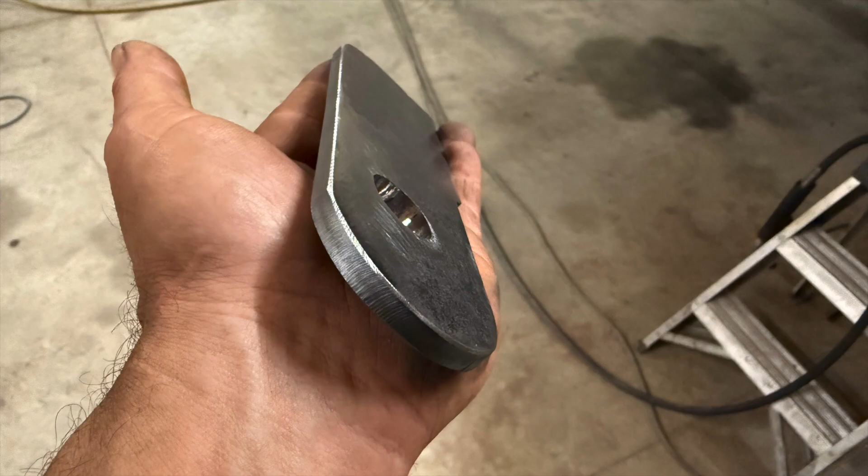Hey y'all, welcome back. Today I'm going to cover how I make simple brackets with my Premier Plasma CNC table using the software that came with it, which is Punch ViaCAD 2D software.

When I first learned how to run my table, I was beating my head against the wall trying to figure out how this thing worked. I watched videos again and again, pushing the pause button tons of times because I was trying to focus in on what he's actually clicking on while listening and putting it all together. So I'm going to show you today, hopefully in slow motion, compared to what I've seen out there.

Now that I've been using this, it becomes second nature, so it's real easy to go fast, but I'm going to try to slow it down so you guys can learn, and hopefully this will be beneficial to anybody with that same type of software or maybe even a similar table, who's just trying to get an idea how this stuff works.

Because I know myself as a fabricator, I loved the idea of the plasma table, and I'd seen how things could be punched out so quickly. But when I first got it, it was frustrating, to the point where I was almost ready to give up and sell the stupid thing, because I thought it was stupid at that time. I was having some emotional kickbacks with this thing, because I don't always like learning.

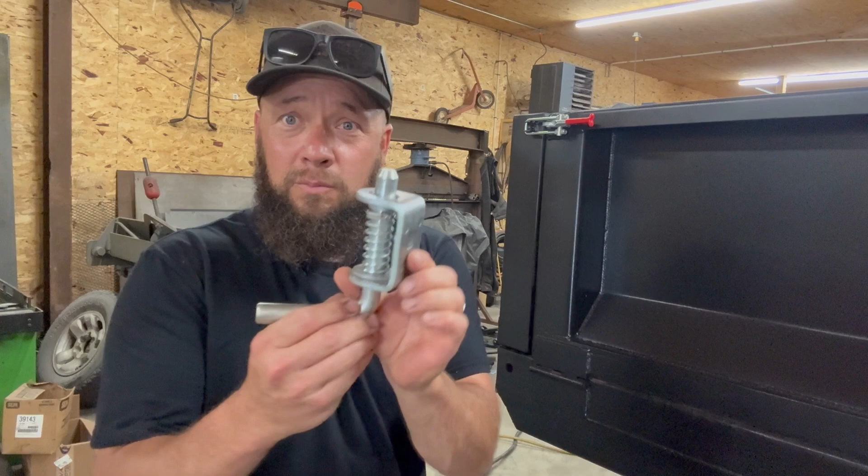You saw on Monday's video that we welded these brackets on. Actually, you saw one bracket. This bracket keeps the side from flopping out, but the main reason I've got this on here is to assist this rigid hitch incorporated spring pin trailer accessory that will be our real latch for holding the heavy material that will be in this bed, instead of blowing away this little basically alignment latch, in our case.

So I'm going to show you how we make the plate. We'll install it, and hopefully it'll be helpful to you.

All right, my first step is that I take my idea and I put it down on paper, and what goes down on paper are the critical dimensions that I need to hit. So we'll do that, and then we'll move to the computer.

Okay, so once you've got your computer fired up, which I'm assuming you can get that far, I look for Punch ViaCAD 2D software. I double click it and wait for the computer to think. Oh, got it up down here.

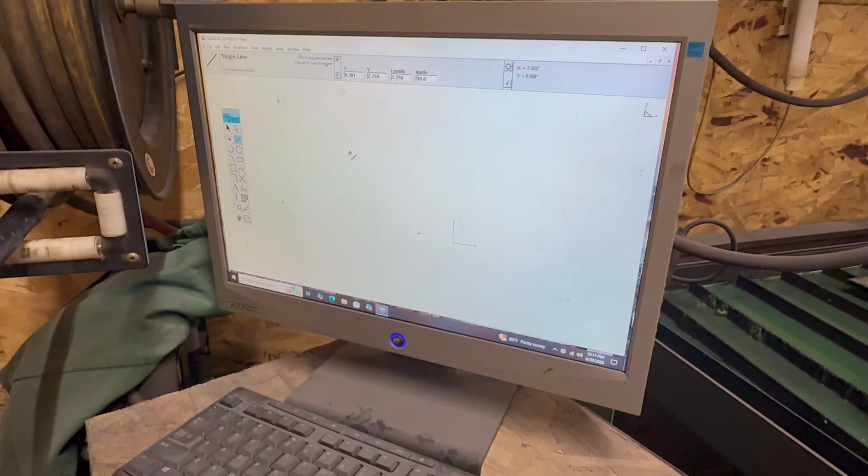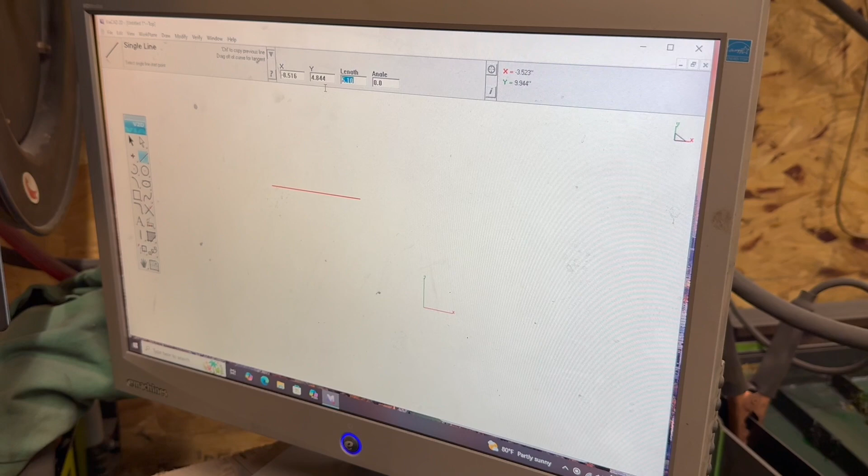So once you've got your screen up, then you've got to select your tool. First tool I'm going to select is the line tool, over here, the black tool with the two dots. My first step is that I'm going to enter 3.5, which in my case will be inches. You can change the settings, but we can go into that another time if you guys so desire.

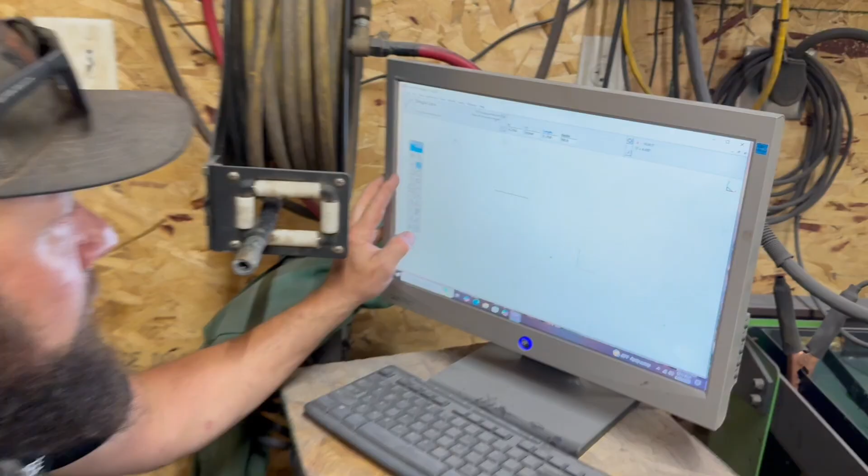So I'm going to start clicking some lines. I'm going to draw a line that's 1.25 inches long. That'll represent my circle down here on my rough sketch. So once I've got that line, I want to put my circle in place. I'm going to go over to the circle tool with 1 point, because I want to be able to click, because this 1.25 inch line represents the distance from the tailgate surface to the center of the latch pin.

This program in my case always defaults to 2 inches. I need a hole that's going to fit a 3/4 inch pin, and I'm going to oversize that hole due to the curve. I can show you what I mean by curve later if you hang tight.

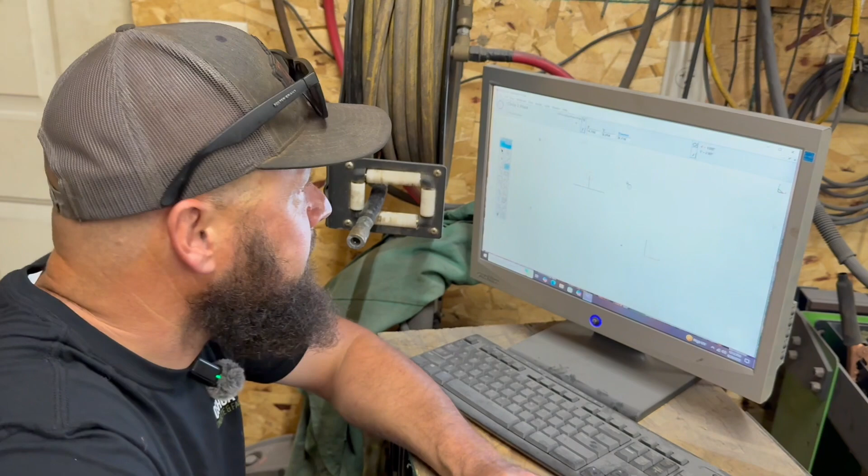So I'm going to go 0.77, I think. That's what I'm gonna shoot for with the material that I'm using. Really, my goal is to not use a die grinder any more than I have to.

Now that I've got the circle there, I'm going to take the hollow arrow and highlight the line that I no longer need. If I left that line in here, it would code in there and it would cut there, and we don't want a cut line there.

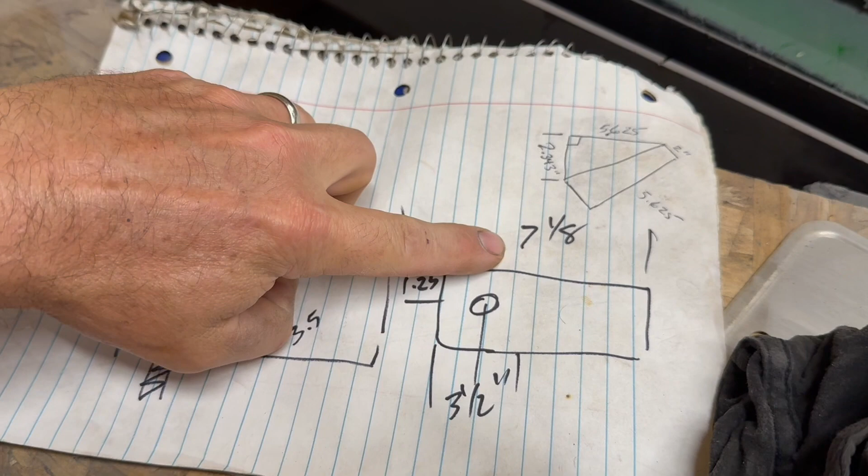Now I just got to complete the rest of the box here. 7 1/8 is my maximum, so I think I'm just going to go 7 inches. I just enter that up on top.

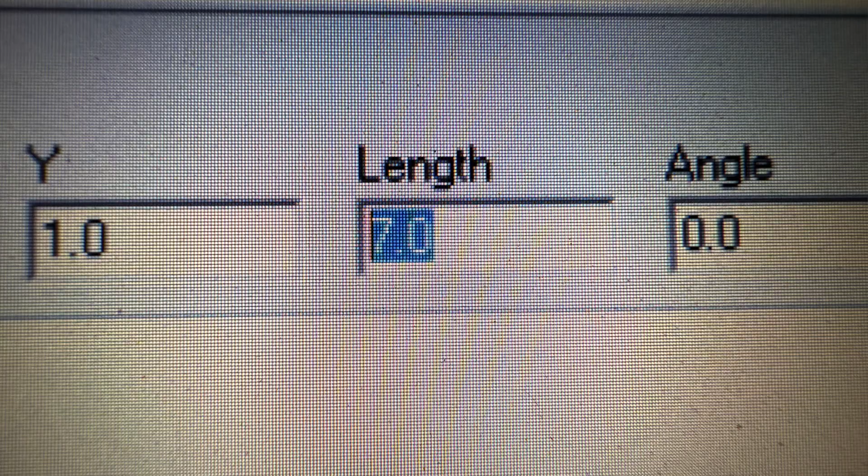There's my length. Now I'm going to go back to my highlight tool because I want to get rid of that 3 1/2 inch line. Just click it, it's gone. Now if you have lines where they're overlapping like that, when you get further down the line, it'll weld them.

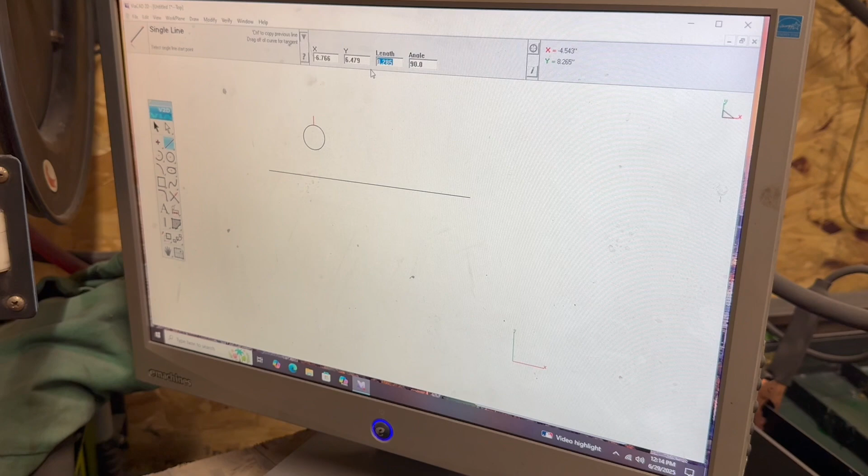So what I want to do is come off the quadrant, the top of the circle. I think I'm just going to go off, let's just do a 1/2 inch, 0.5 inches. I'm going to use that as some sort of a gauge. I'm going to go up here and click the line.

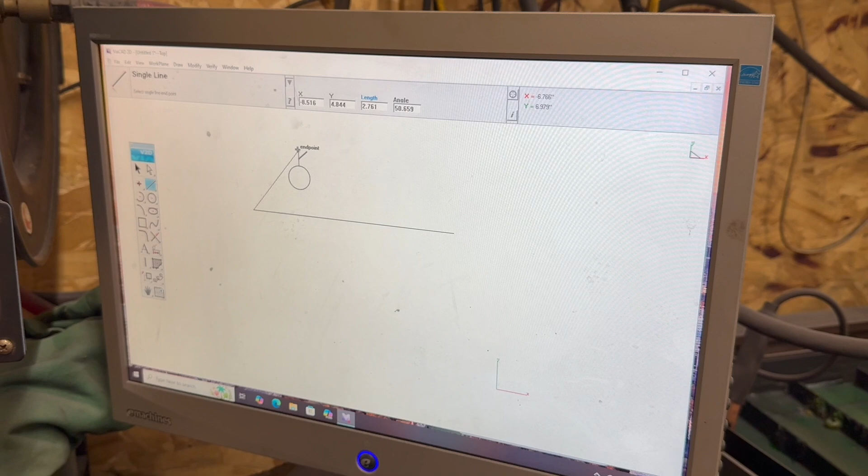I'm going to stop here for a second. I'm just going to hover over the end of the line, and when it says endpoint, I click once, and then I want to line up with the top of that, and it'll leave this dotted line all along there. And so it says along X.

X is your left and right movement. So I'm just going to click that. Now I've got a line. I'm going to carry on.

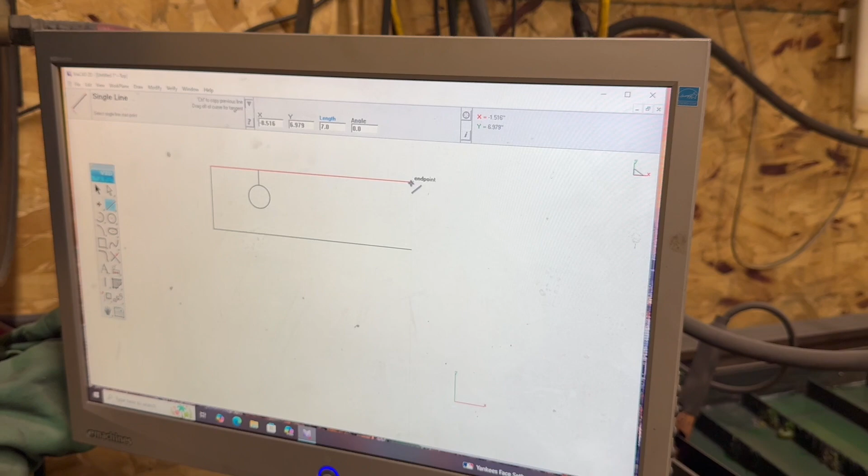I'm going to run across here and touch off this endpoint box, or box that's square. Now I'm going to connect from end to end. And now this is my basic bracket shape.

Pretty simple. Delete. Now I think these corners here, I want to soften them. These sharp corners down here won't matter, as they will be buried in weld. So I'm going to go over to my tool options again.

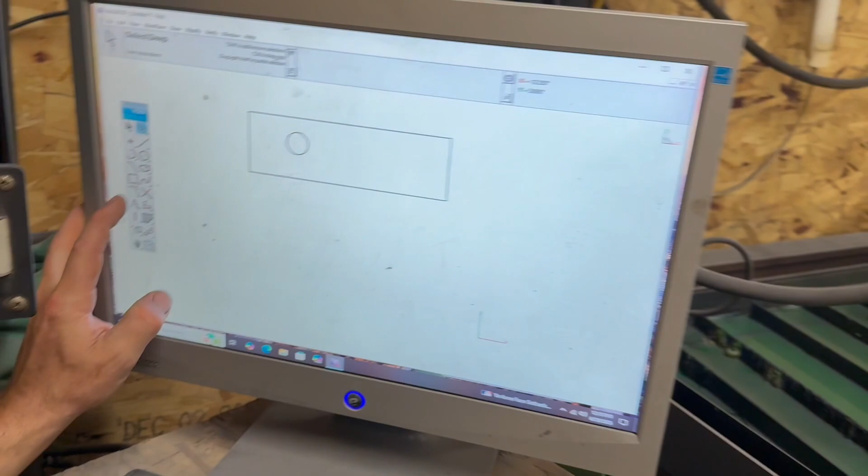I'm going to click on this one where it's got a curved line and this little light black line that shows it square, but it's got 2 dots on it. That's our radius tool, so we're going to add a radius. It defaults to 1/2 inch radius.

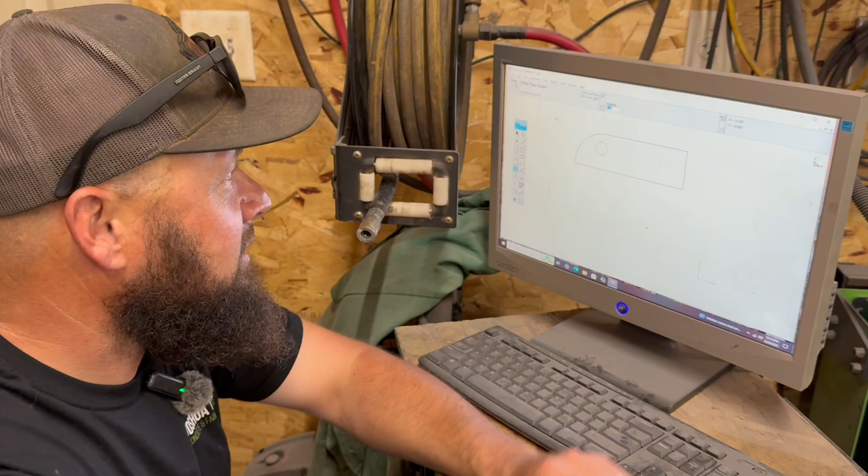I'm just going to go up here, go under edit, and I'm going to undo the fillet. Now I'm going to reselect the fillet and click on each of the lines where I want the radius.

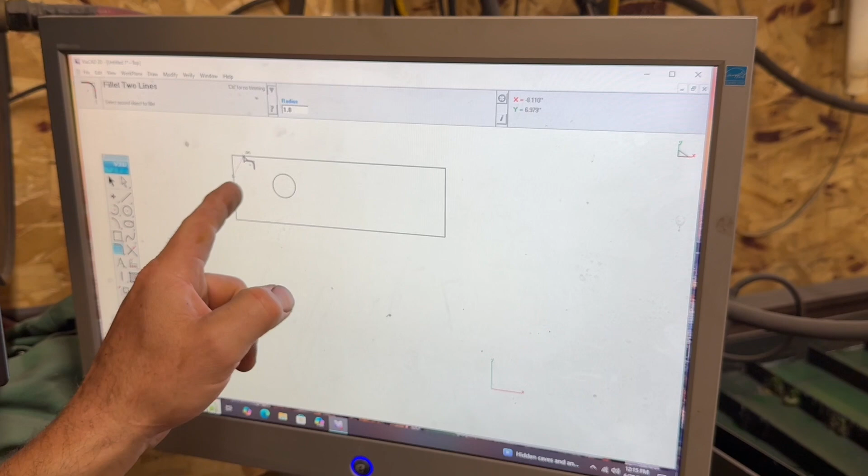We'll do the same thing here and there. Hopefully this is so far so good. I'm trying to go slow so that it is more easily picked up on by you guys.

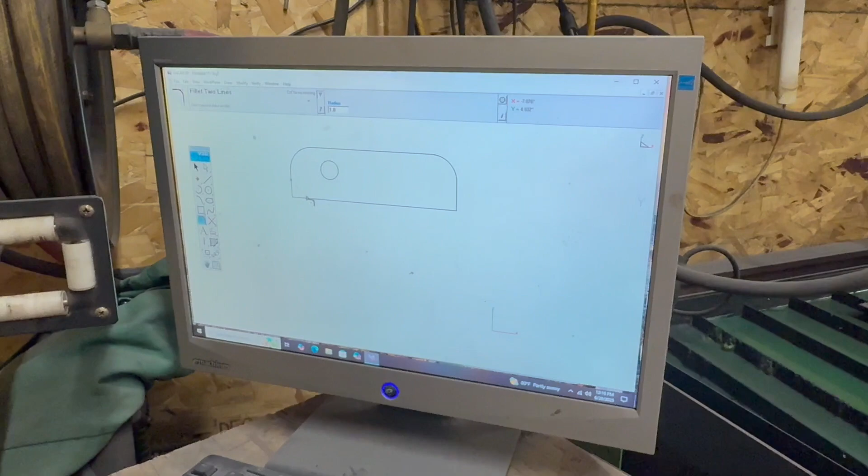Okay, now that I've thought about this, I'm going to take my radius tool again, and I'm going to put one on this lower corner, because this portion will actually come in contact. This is about visualize, if you can visualize what you need.

Sometimes some people will take cardboard and cut templates. And if you do that, great, if that works for you. If you're going to do that, my suggestion would be to make sure you put dimensions on that so you can kind of keep it all straight.

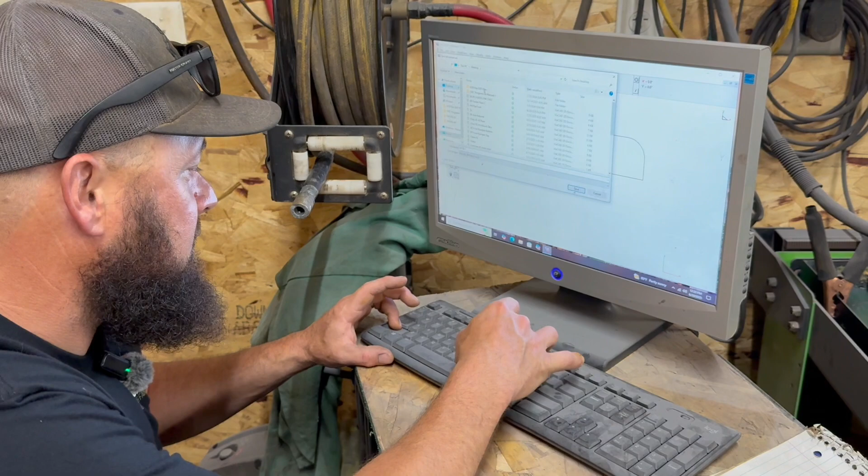So now once you've got your part drawn up, your next step is to save it. And if you haven't made this part, if you're starting with a brand new part, you click Save As. I'm going to call it DT, TG for tailgate, L for latch. That's just my code. It won't matter because I won't save this for the long term, since it's just a one-off part.

I'm not going to run multiples. If I'm going to run multiple parts, I'll save them for the future with a real specific name that I can read, or anybody can read easily, with a solid description. So I'm going to click Save.

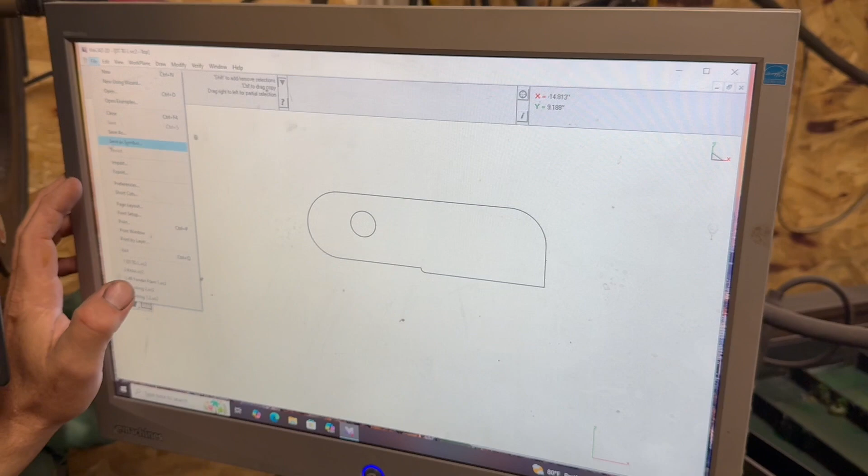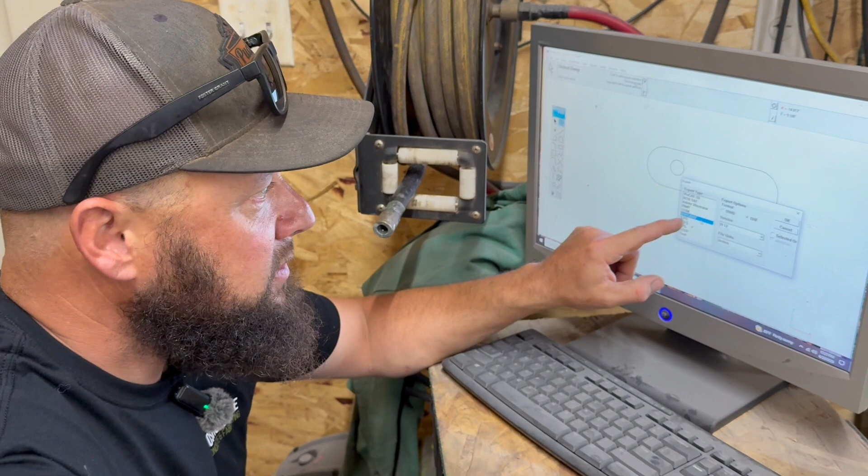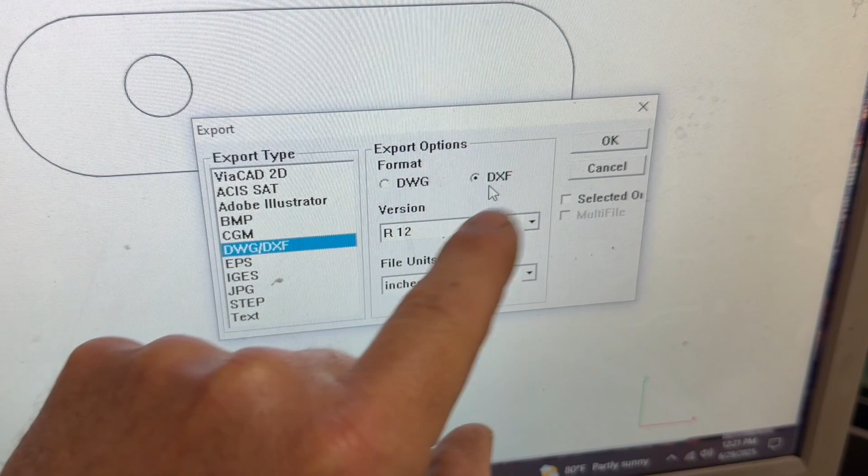Then I'm going to go back up to File, and then Export. I need to select, making sure the DXF is highlighted. This one, in my case, is DWG/DXF. That's the key file type you want to have. Make sure your format is DXF in your export options, which is over here on the screen. Then we're going to click OK.

Now it's going to give us an option, going back in here. You can see, do we like the name of the file? Yes, I do. So then I'll go over here and click Save.

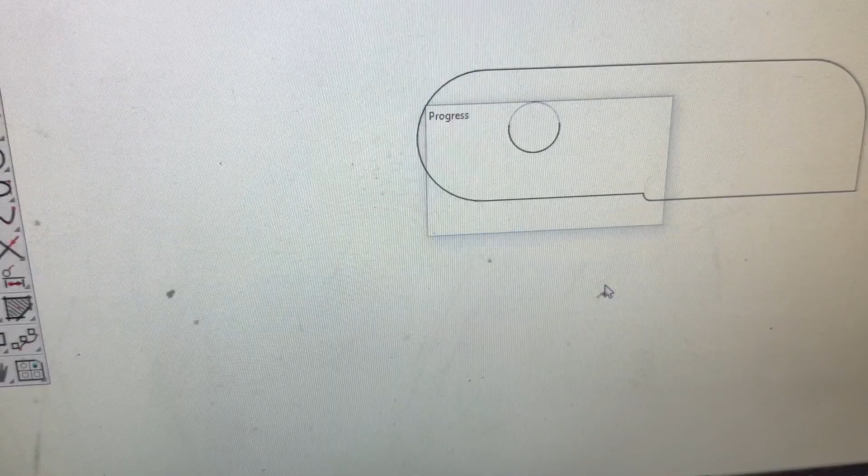So now at this point, now that we've got the drawing made, saved, and exported as a DXF, we can close this out. I'm just going to minimize it because sometimes you end up making a part twice or three times, depending on the variables or mistakes you make.

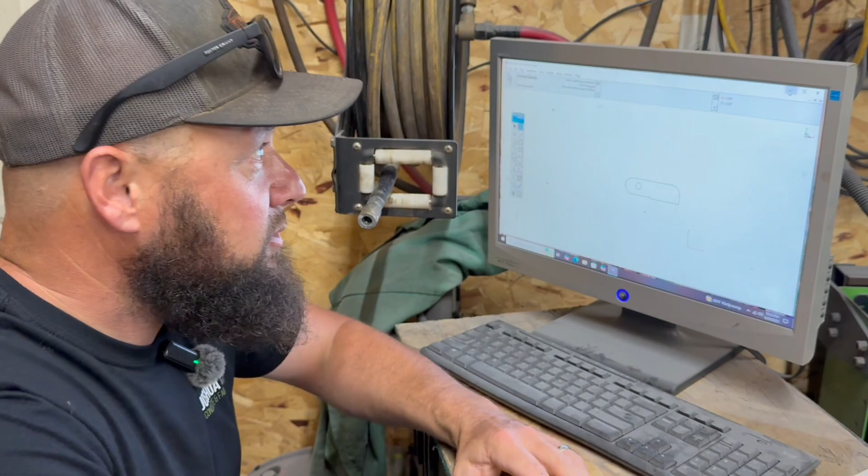So my next step, once we've got this export, we've got to have some place to pick it up and get our file. So now I've got to look for SheetCAM, which will give us the G code that we'll need. Don't worry about the name G code right now.

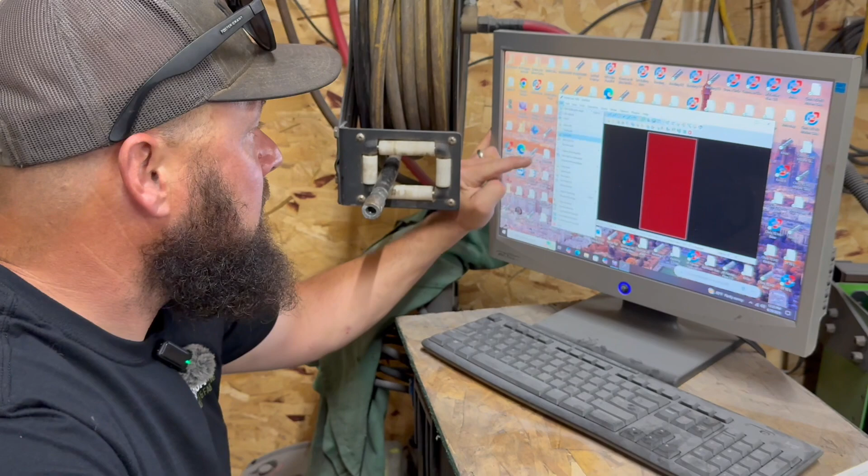So once I've got SheetCam open, I'm going to go import a drawing. Then I'm going to scroll down through all my files here and look for the one I'm wanting, the dump truck tailgate latch. I'll click open.

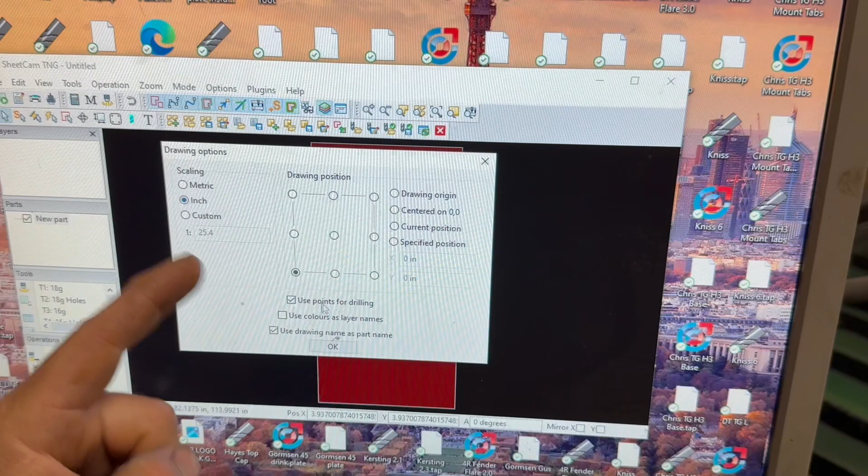Here it says you want to make sure your scaling is inches or metric, whatever you want. I like to stick with inches because that's what I drew it up as. So click OK, my drawing shows up. All these lines are connected. Nothing's white, you've got yellow and red lines, which is normal.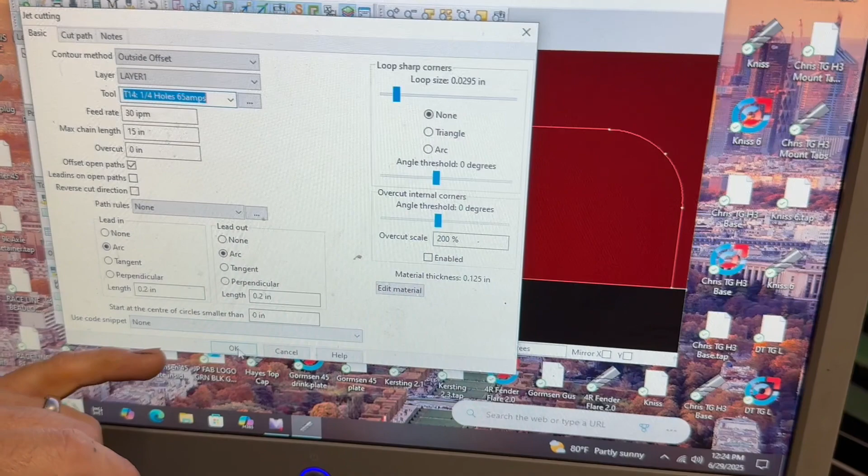Arc in, arc out, you don't necessarily have to worry about that right now, but I like it because it makes a cleaner product, and you'll get to see it in a second. So once you click that, everything should look green. It'll show you your tool paths. There's your arc in and arc outs. Those are nice, so that whenever this thing pierces, if you don't have that, it'll leave a choppy hole where it starts.

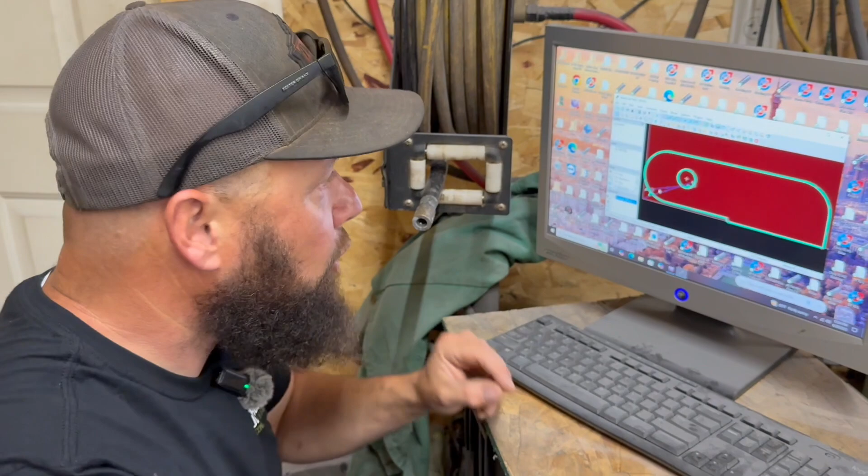So once you've got your drawing in with the number of parts and pieces, in this case we're just going to keep it simple and make one. You go back up to File. If you want to zoom in here, go up to File. You click on Run Post Processor. A new window comes up, and I'm just going to click Save.

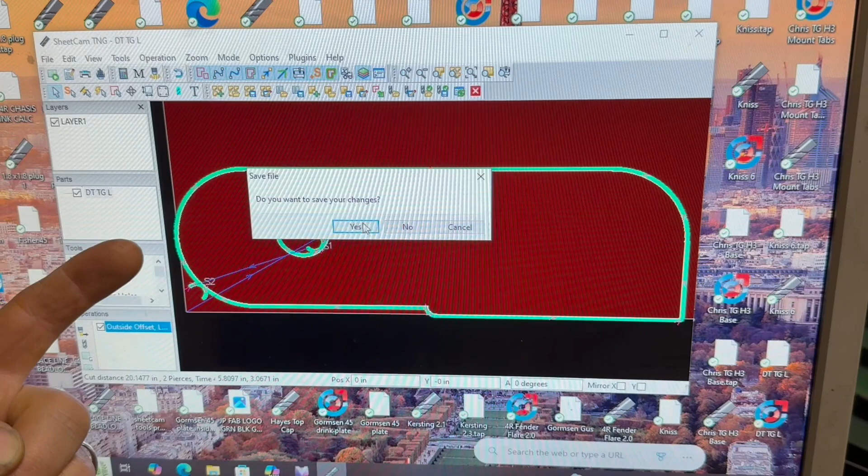Running Post Processor, Post Processing, process completed. So once it says it's completed, you just click OK. Now we're just going to close this out. We want to save our changes, yes. Then we'll save it again, yes.

Now we've got to open up Mach 3 Loader. This program runs the computer box, the brain box, we'll call it, for your plasma table. Okay, once you've got this open, once you have Mach 3 open, you'll see this screen.

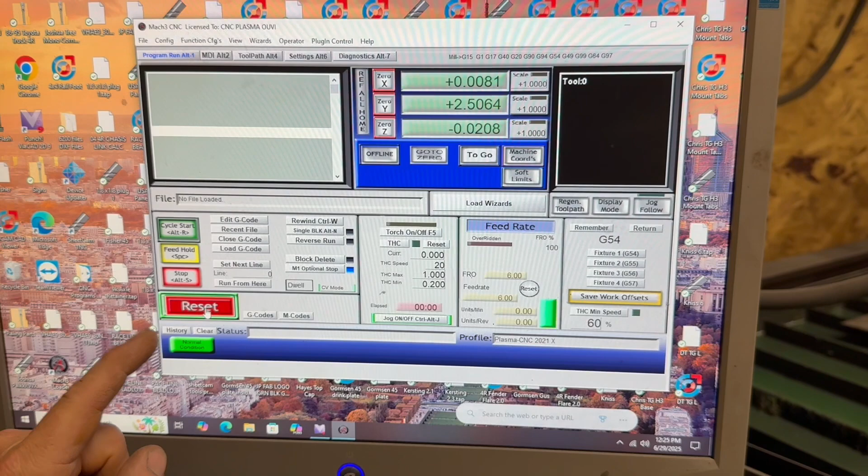Once you've got this reset button, you click it once. This will now allow us to control the machine. I've got to plug my machine in.

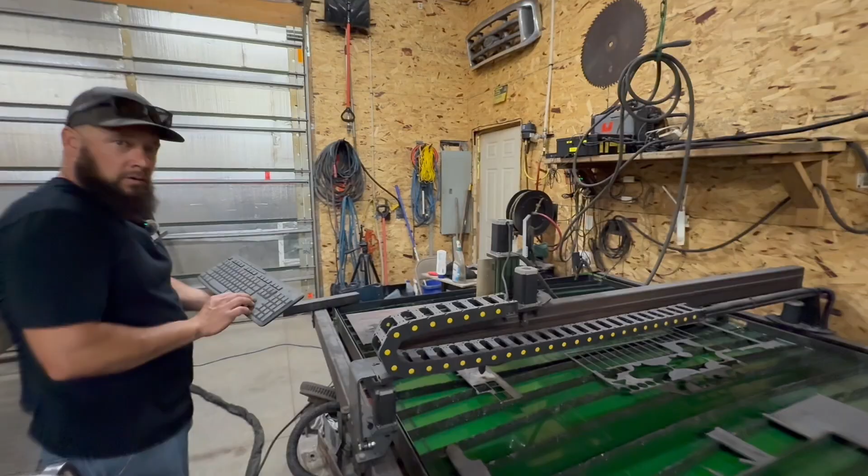Once you've got it plugged in, you can use the cursor arrows on your keyboard to move left and right, up and down the table. And you can use your page up and page down to control the torch height.

I position my torch where I want my starting point to be, and I'm just going to run this left and right to make sure my piece of steel is on square. Once I have my location, we need to go back over to the computer screen.

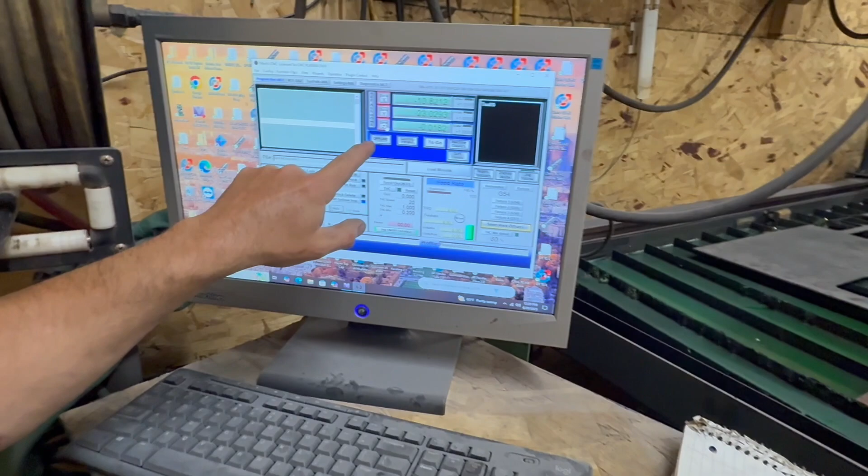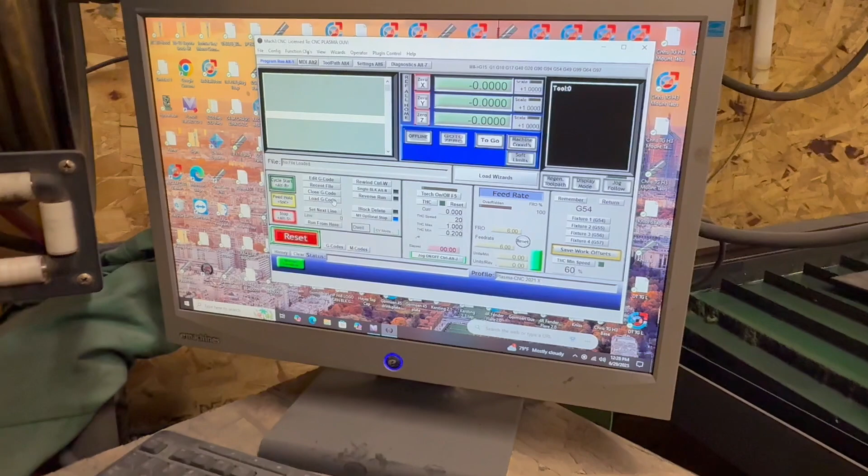Now that I've got my location, and I hope the piece of steel is big enough since I'm just eyeballing it, I'm going to go up here on Mach 3 and zero out my X, my Y, and my Z. That tells the torch where you want it to start, in lay terms.

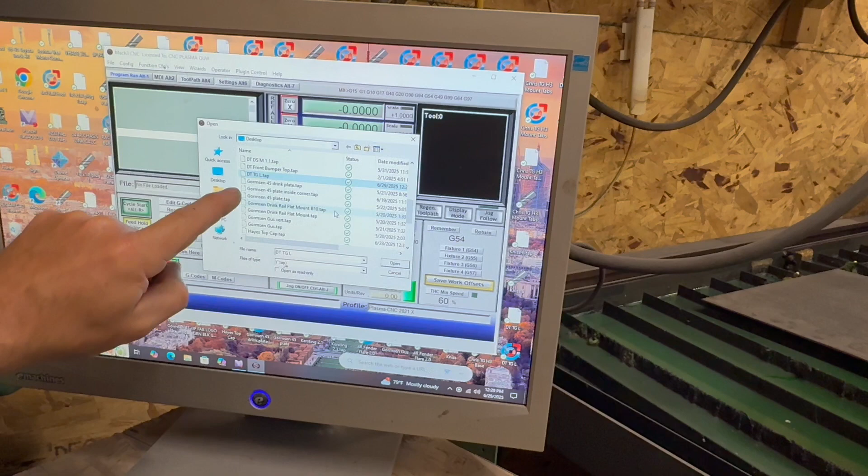You come back here and load a file — we need to load G code. That's the code that tells the torch where to go. So we're going to look for our tap file, this is one we've made. The drawing shows up on our screen over here.

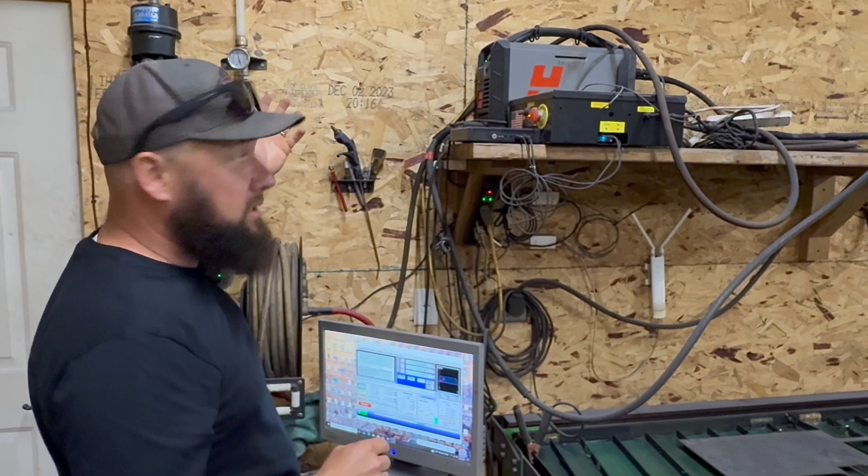Once that's all loaded up, the next thing we need to do is make sure our torch is on, our plasma torch. That's on, it's not flashing any lights. So then all that's left is to come in here and click Start Cycle, or Cycle Start.

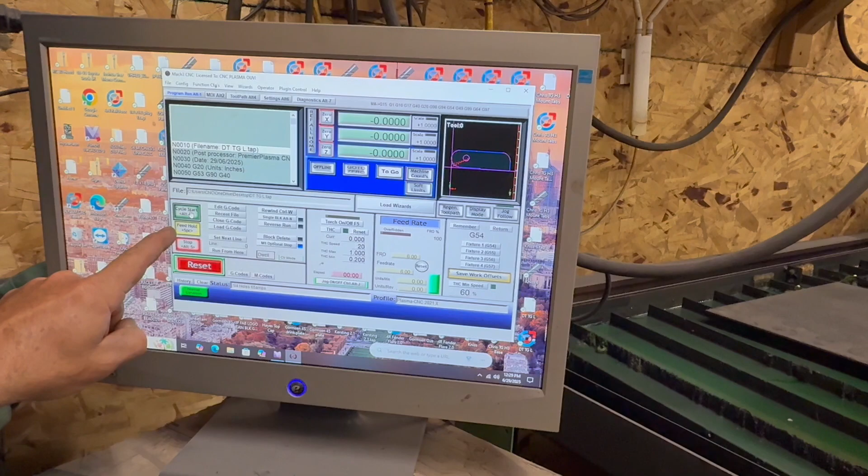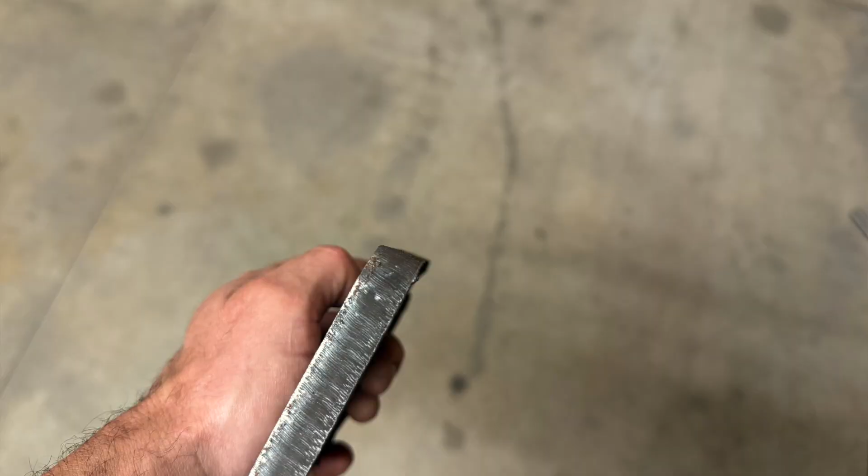Okay, here's our part. When I was saying kerf, that kerf is the cut line, and sometimes that kerf ends up angled like this, depending on the amount of wear in the tip. I'm thinking with the amount of kerf or the angle here, it's time to replace my tip.

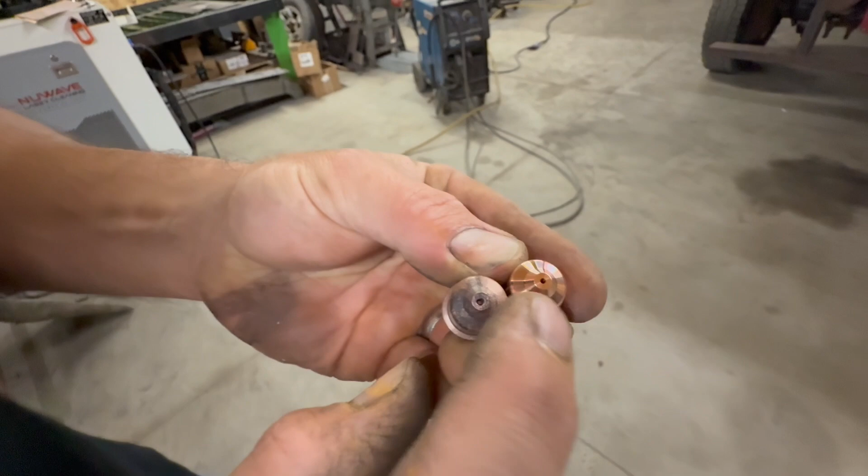Okay guys, I want to zoom in here and show you what the cut tips look like. Here's a brand new one, and if you've got a brand new machine, you know what they look like. If you're wondering what kind of cut quality you get out of a tip that's washed out like this, you can see it's bigger and kind of oblong shaped — almost twice as big.

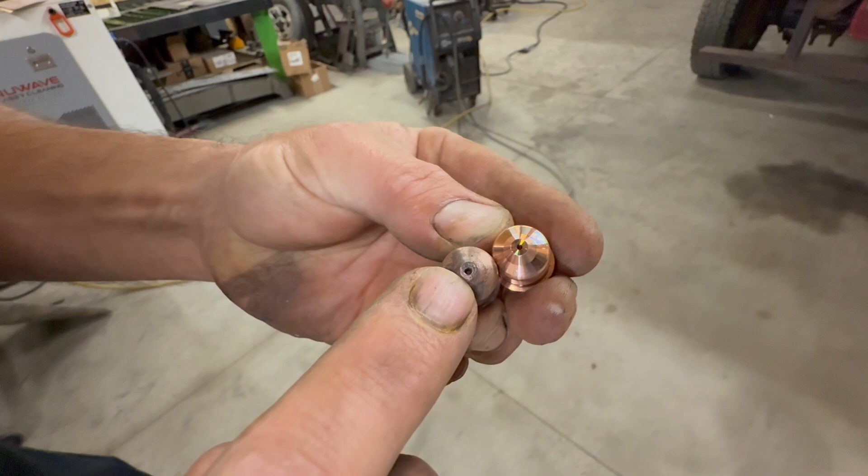The net result is going to give you a kerf like I showed you just a couple seconds ago. I'm going to show you what a kerf looks like with a new tip.

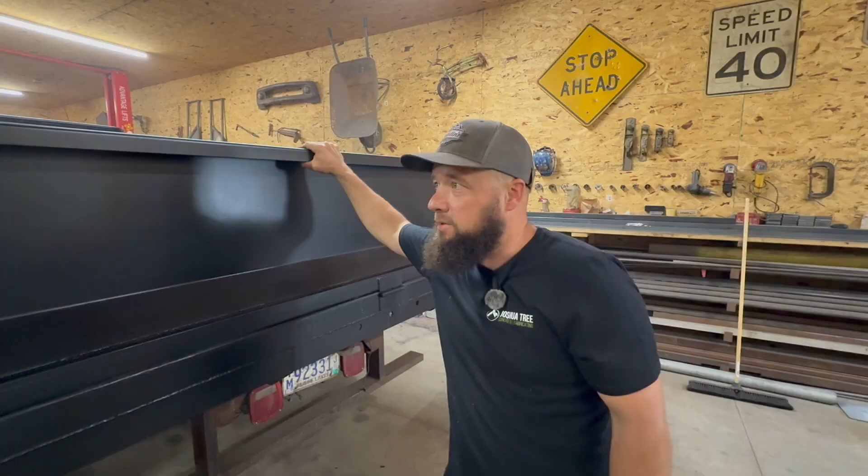Now I've got to get on to spraying this down with some Raptor liner, some bed liner, to give it a more finished look and a little more protection from rock dings and the elements. Got to get more than just a base layer of primer and paint, so I better get to that.